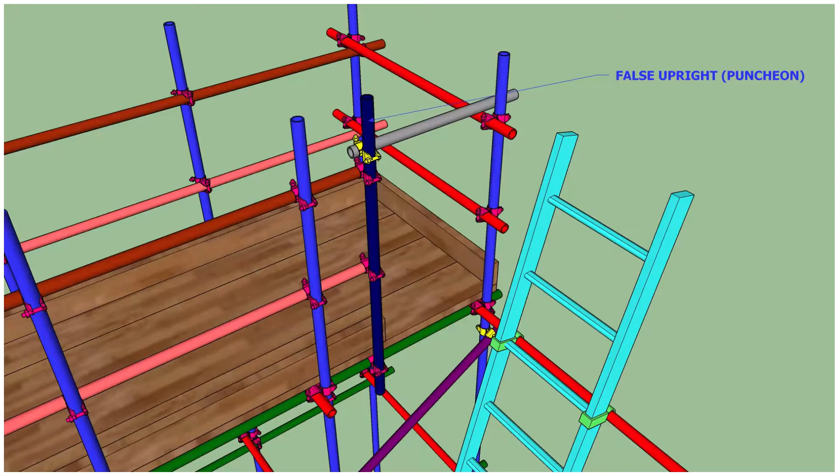Scaffolding refers to a temporary structure or framework built to support workers and materials during construction, maintenance, or repair of buildings, bridges, or other structures. It is typically made of metal pipes, tubes, or wooden planks that are interconnected to create a stable platform for workers to access different areas at various heights.

Most scaffolds fall into one of the primary categories: tube and coupler scaffold, cup-lock scaffold, suspended scaffold, mobile scaffold, system scaffold, supported scaffold. Scaffolds are classified according to their intended use as light duty scaffold, designed and constructed to carry the weight of workmen only, with no material storage other than the weight of tools. Commonly used for inspection, painting, access and light cleaning.

Medium duty scaffold, designed and constructed to carry the weight of light materials, tools and workmen. Scaffolds used for abrasive blast cleaning, sandblasting, shall be classified medium duty if there is potential for buildup of abrasive on the platforms. Heavy duty scaffolds, specially designed and constructed to carry maximum intended loads greater than 240 kg/m2, such as masonry work, piping or equipment, and is classified as a special scaffold.